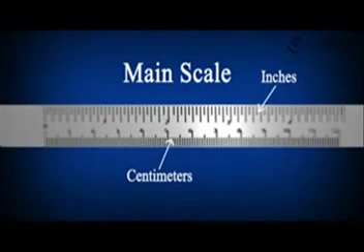It consists of a long rectangular metal strip which has a fixed jaw on one end. It is graduated in inches at its upper end and centimeters at its lower end, which is called the main scale. There is a movable rectangular metal strip which is graduated with a special relation to that of the main scale, which is called the Vernier scale, which slides over this long metal strip. It has a jaw similar to that of the main scale.

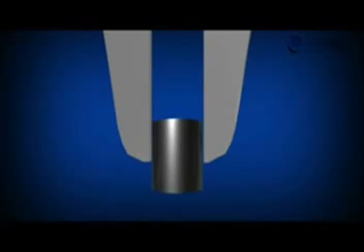These jaws together are used to hold the object firmly while measuring its length, which is not possible with a meter scale. These jaws are called the external or lower jaws, which are generally used to measure the diameter of a sphere or a cylinder. These jaws are extended to other sides, called the upper or the internal jaws, which are generally used to measure the internal diameter of a hollow cylinder. There is also a metal strip attached at the back of the Vernier calipers, which is used to measure the internal depth of a cylinder.

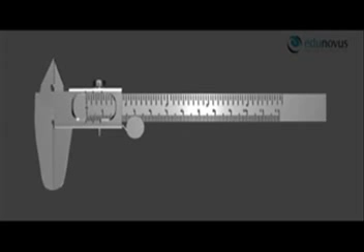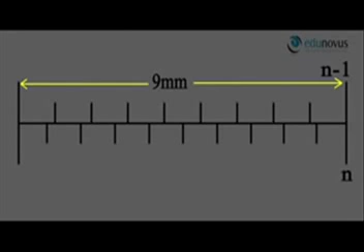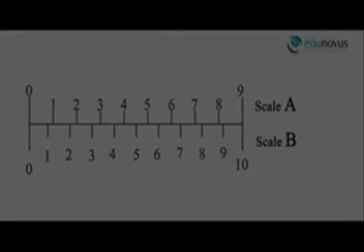This instrument works on a simple principle known as the Vernier principle. According to the principle, a given length x is divided into n-1 and n smaller divisions, each division of different lengths, which are represented by two scales as shown. Let us say the distance of 9 mm is divided into 9 divisions on one side and 10 divisions on the other side. Then 10 divisions of scale B is equal to 9 divisions of scale A. 10B = 9A. B = 9A/10. B is equal to 0.9 divisions on scale A.

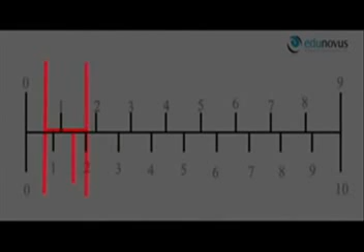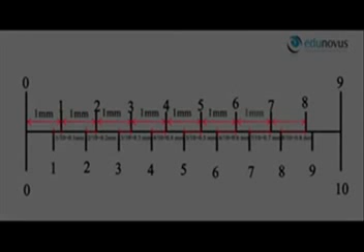Here, the upper scale, scale A, is called the main scale, and the lower scale, scale B, is the Vernier scale. One Vernier scale division is equal to 0.9 main scale divisions. As the length of the main scale division is equal to 1 mm, one Vernier scale division is equal to 0.9 mm. Therefore, each Vernier scale division is shorter than the main scale division by 1/10 of one main scale division, or 0.1 mm. Thus, as we can clearly see, the first mark of the Vernier scale is short by 1/10 of the main scale division. Thus, the 10th mark of the Vernier scale is short by 10/10 of a main scale division, and therefore the 10th division of the Vernier scale coincides with the 9th division of the main scale.

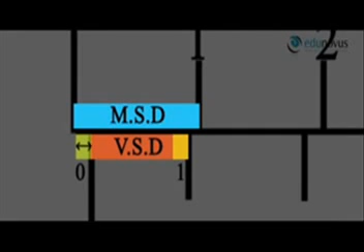Now, let us try to move the Vernier scale very slowly from left to right. Now, the 0 of the Vernier scale is moved to the right marginally, and the first mark of the Vernier scale still does not coincide with the first mark of the main scale. In this case, we cannot measure the displacement. Now, we try to move the 0 until the first mark of the Vernier scale coincides with the first mark of the main scale. Now, we can firmly say that the displacement of 0 Vernier scale from 0 main scale is 0.1 mm, because the first mark is 0.1 mm shorter than one main scale division as explained before.

Now, we move even further such that the second mark of the Vernier scale coincides with the second mark of the main scale division. The distance between the two zeros is 0.2 mm because the second Vernier scale division is 0.2 mm shorter than the second main scale division. Similarly, when the 10th mark of the Vernier scale coincides with the 10th main scale division, the distance between them is 1 millimeter. Therefore, the distances are of order 0.1, 0.2, 0.3, up to 1 mm. Thus, we can say that the least distance that can be measured accurately by the Vernier calipers, also known as the least count or the Vernier constant, is 0.1 mm.

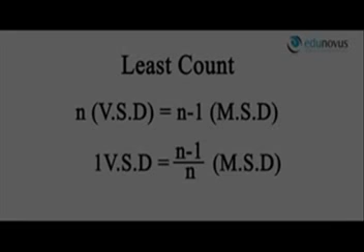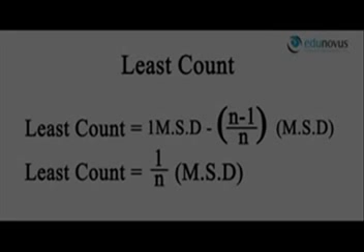The distance is nothing but the difference between one main scale division and one Vernier scale division when both zeros are coinciding. Thus, least count is equal to 1 main scale division minus 1 Vernier scale division. In a Vernier calipers, where n divisions of the Vernier scale are equal to n minus 1 divisions of the main scale at any given length, one Vernier scale division is equal to (n minus 1)/n main scale divisions. Substituting the value of one Vernier scale division in the equation, least count is equal to main scale division minus (n minus 1)/n main scale divisions. Simplifying the equation, we get least count is equal to 1/n main scale divisions, which is the length of one main scale division by the number of divisions of the Vernier scale.

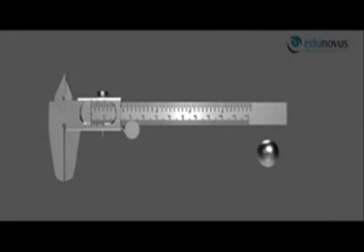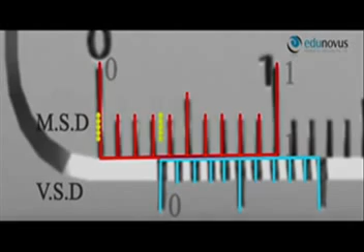After obtaining the least count of the vernier, let us proceed to calculate the length of any given object. Now, let us say a very small object of length x is placed between the jaws. In order to find the length of the object, we need to calculate the distance between the two zeros. This can be obtained by subtracting the length from 0 to coincidence of main scale division and vernier scale division, and length from 0 of vernier scale to coincidence of vernier scale.

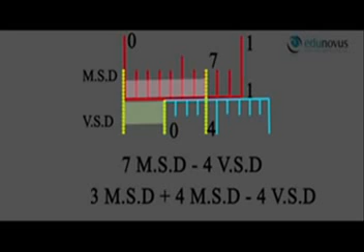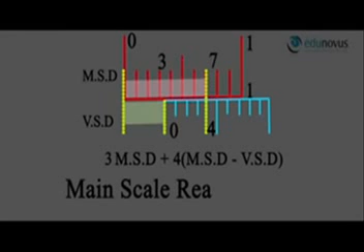Here, it is 7 main scale divisions minus 4 vernier scale divisions. This can be written as 3 main scale divisions plus 4 main scale divisions minus 4 vernier scale divisions, which is 3 main scale divisions plus 4 into main scale divisions minus vernier scale divisions. 3 main scale divisions is equal to reading that can be measured by the main scale. Therefore, it is main scale reading. It is 3 mm as one division of main scale is 1 mm.

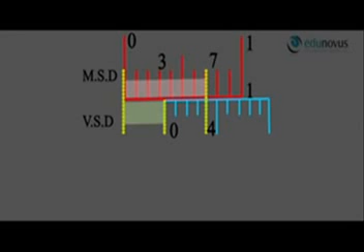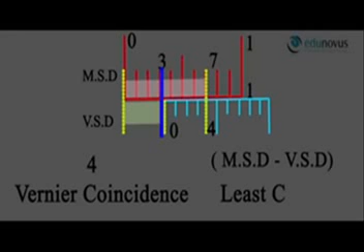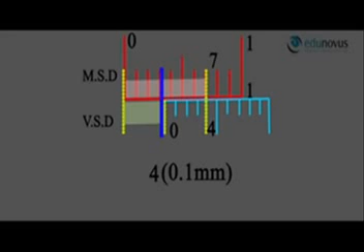Now, this portion is the extra portion between the 3 main scale division and the 0 of vernier scale, which would be measured by the vernier scale and is nothing but 4 into main scale division minus vernier scale division. 4 is the vernier coincidence. Main scale division minus vernier scale division is the least count or the vernier constant as calculated before. It is 0.1 mm. 4 into 0.1 is equal to 0.4 mm. Thus, the length is 3 plus 0.4, which is 3.4 mm.

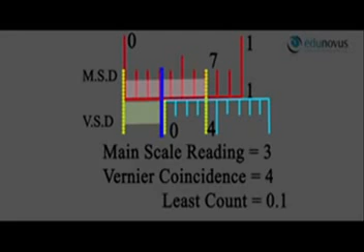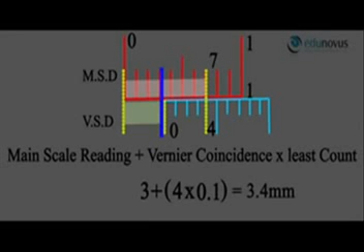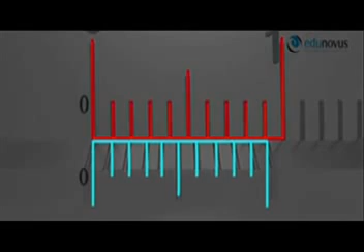Thus, the formula for total reading is given by main scale reading plus vernier scale coincidence into least count. Thus, we use this formula to find out the total reading measured by the vernier calipers. Some instruments we usually find in the laboratory suffer from excessive wear and tear and also manufacturing defects. The 0 of the vernier scale does not coincide with the 0 of the main scale. It is either right or left of it.

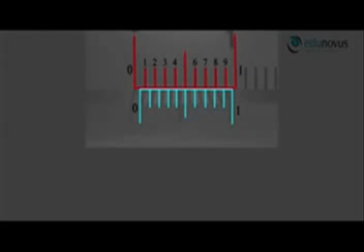So, let us say in the given instrument, say vernier calipers A, the 0 of the vernier scale is to the right of the 0 of the main scale. In this case, a particular division of the vernier scale coincides with the division of the main scale. Now, this can be understood as the vernier calipers is already measuring a certain length, as if an object is placed in between its jaws, even though no object is being held. Now, the extra distance is the extra reading. The given vernier calipers is measuring an extra length than the actual length when an actual object is to be measured. Thus, our interest is to measure this extra length.

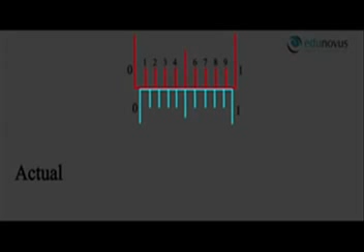Now, in this device, for example, an interesting point is observed that the fifth division of the vernier scale is coinciding with the division on the main scale when it normally should be at 0.5 mm to the left or right of any division. Thus, we can say that this extra length, which is wrongly measured by this vernier calipers, is 0.5 mm. Therefore, we reduce this length of 0.5 mm from the observed readings to obtain the actual reading. This type of error, in which the 0 is to the right of the 0 of the main scale, is called the positive 0 error. The correction we make is called the 0 correction, and in this case it is negative 0 correction.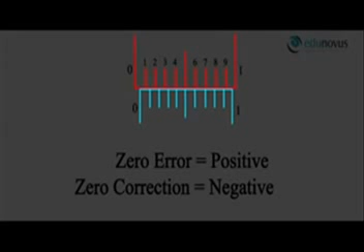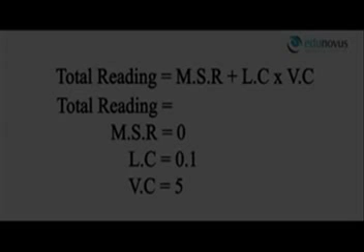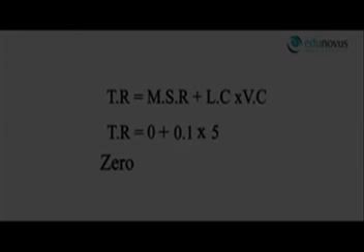This reading can also be simply obtained by using the formula we discussed before. Total reading is equal to main scale reading plus least count into vernier coincidence. Here, main scale reading is equal to 0. Least count is equal to 0.1 mm and vernier coincidence is equal to 5. Therefore, 0 error is equal to 0 plus 0.1 into 5, which is 0.5 mm. And thus, 0 correction is minus 0.5 mm.

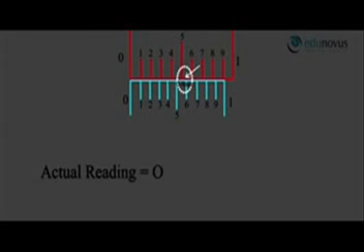Similarly, when the 0 of the vernier scale is to the left of the 0 of the main scale, it actually measures less length than the actual length. Now, let us say, for example, in this given vernier calipers B, the 0 of the vernier scale is to the left of the 0 of the main scale, and the sixth division of the vernier scale coincides with the division of the main scale. But in normal devices, which are free from 0 error, the sixth division is actually at 0.4 mm ahead of the main scale division. Thus, we can conclude that this particular device measures a less distance of 0.4 mm. Thus, in order to obtain the actual reading, we need to add this to the observed reading. This type of 0 error is called the negative 0 error, and the correction is positive.

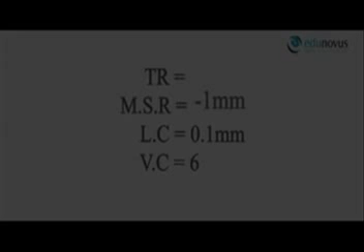As usual, this error can also be calculated using the formula. Main scale reading is minus 1 millimeter. Vernier coincidence is equal to 6 and least count is equal to 0.1 mm. Therefore, error is equal to minus 0.4 mm and the correction is plus 0.4 mm.